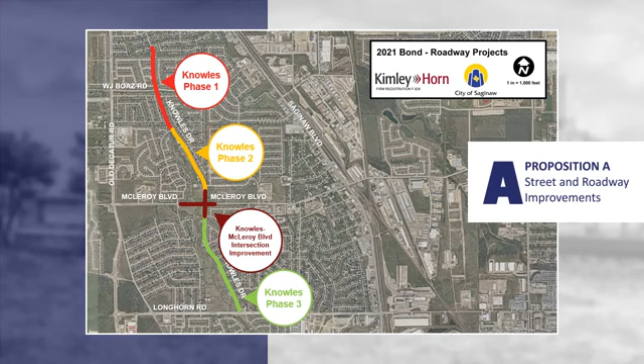Proposition A includes the following projects: Knowles Drive Phase 1, Edwards to Woodcrest, intersection improvement at W.J. Boaz. Knowles McLeroy Boulevard intersection improvement, including eliminating the low water crossing on West McLeroy Boulevard. Knowles Drive Phase 2, Woodcrest to McLeroy Boulevard. Knowles Drive Phase 3, McLeroy Boulevard to Longhorn. West McLeroy Boulevard Phase 3, Saginaw Boulevard to Knowles. West McLeroy Boulevard Phase 4, Knowles to Old Decatur.

Some of the projects may be eligible for matching funds from the Tarrant County November 2021 Transportation Bond Program. Any remaining funds from approved bond could be allocated towards other transportation or street projects.

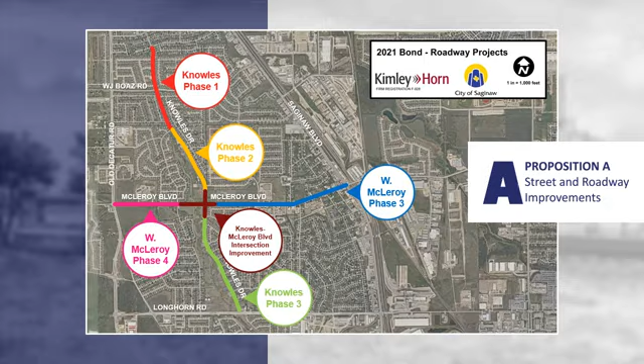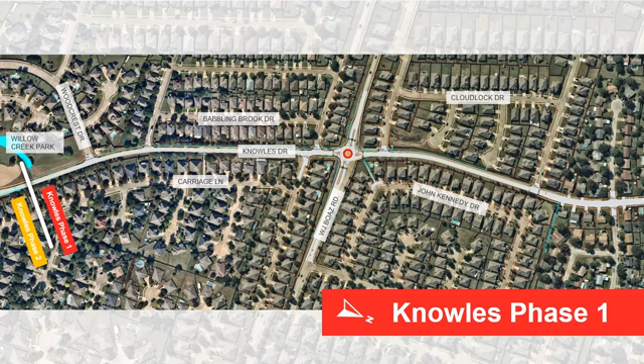Knowles Phase 1 is proposed to be a 2-lane concrete roadway with curb and gutter and sidewalk on the west side of the road. The limits of this phase are from just south of Woodcrest Drive to Edwards Drive, approximately 3/4 of a mile. There will be a single-lane roundabout located at the intersection of Knowles Drive and W.J. Boaz Road, replacing the current 4-way stop-controlled intersection. The proposed project also includes an internalized storm drain system, which will improve storm drain capacity to alleviate flooding in the adjacent neighborhoods.

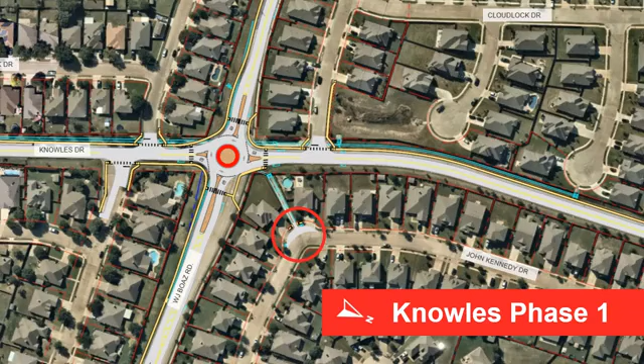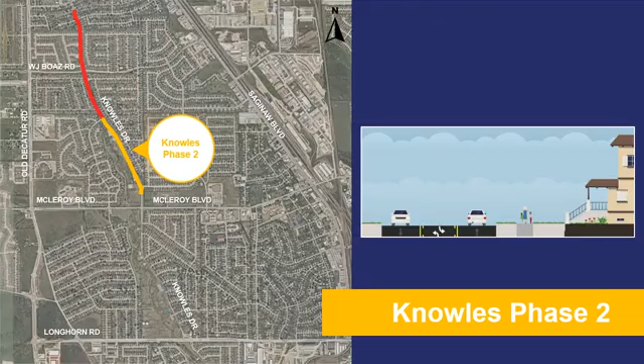Knowles Phase 2 is proposed to be a 3-lane concrete roadway with curb and gutter, including a center turn lane with sidewalk on the east side of the road. The limits of this phase are from north of McLeroy Boulevard to south of Woodcrest Drive, approximately 1/3 of a mile. There will be a pedestrian crossing from the neighborhood to Willow Creek Park near Kingsbrook Lane. The proposed project also includes an internalized storm drain system, allowing for the removal of the existing roadside ditches.

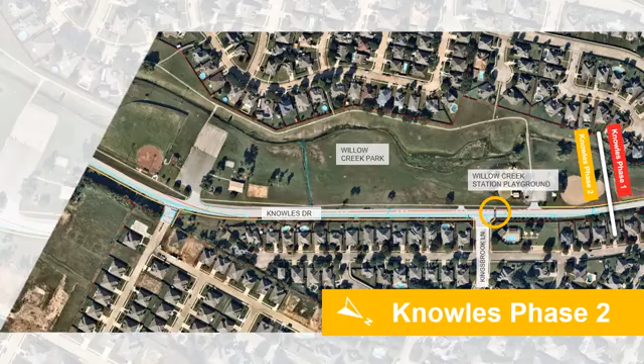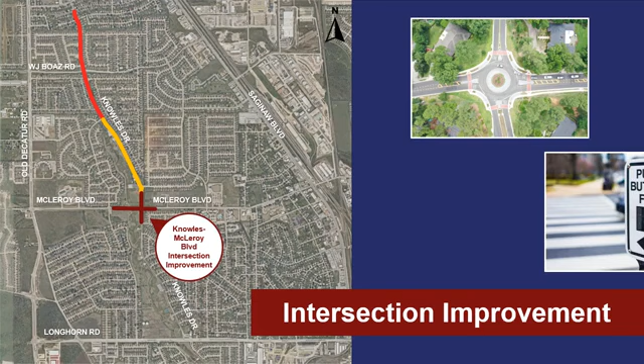Knowles McLeroy Boulevard intersection improvement is proposed to be a single-lane roundabout located at the intersection of Knowles Drive and McLeroy Boulevard, replacing the current signalized intersection. There will be enhanced pedestrian crossings at the intersection, which include raised crosswalks and push-button activated pedestrian crossing signs. A wider pedestrian crosswalk will be featured in the roundabout to ensure pedestrian safety, especially the crossing of McLeroy Boulevard on the west side of the intersection. This will allow for larger gathering points on both sides of the road and give pedestrians a much larger safe harbor space in the middle of the crosswalk when proceeding through the intersection.

Part of this project will include raising McLeroy Boulevard and upgrading the storm crossing just west of Knowles Drive to alleviate frequent flooding issues. Currently, the creek overtops the roadway during a major storm event, causing it to be closed for safety.

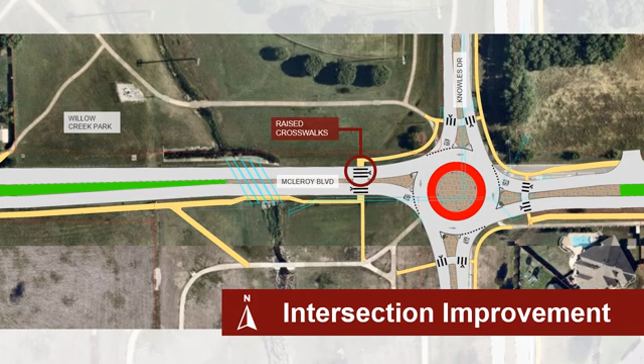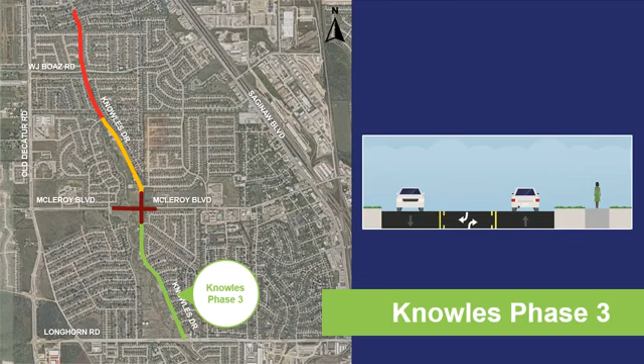Knowles Phase 3 is proposed to be a 3-lane concrete roadway, including a center turn lane with sidewalk on the east side of the road. The limits of this phase are from Longhorn Road to south of McLeroy Boulevard, approximately 3/4 of a mile. The project also includes the installation of a traffic signal at the intersection of Longhorn Road and Knowles Drive, and 2 pedestrian crossings from the neighborhood to Willow Creek Park. The proposed project also includes an internalized storm drain system, allowing for the removal of the existing roadside ditches.

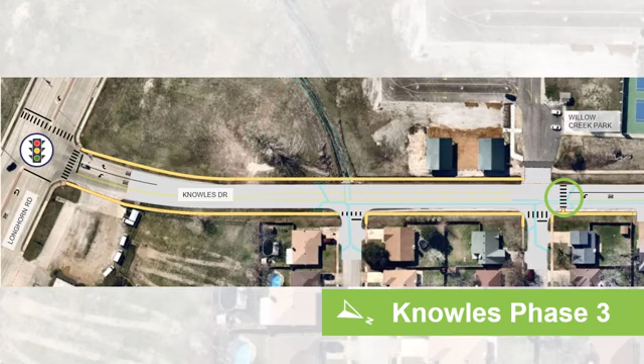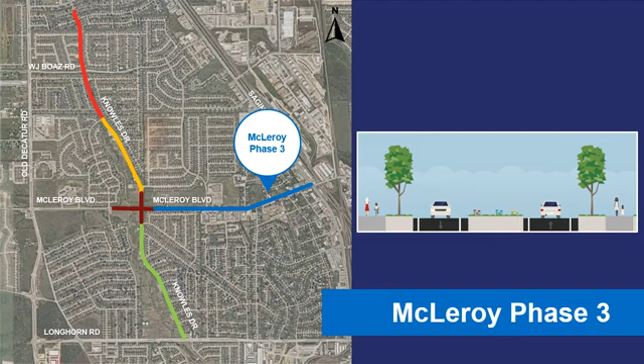The limits of McLeroy Phase 3 are from Knowles Drive to Saginaw Boulevard, approximately 1 mile. This section of McLeroy is planned to have 1 lane in each direction, raised landscape median or center turn lane, 8-foot wide sidewalks, and on-street parking where feasible. The section of McLeroy will be landscaped and provide pedestrian improvements to allow for parking and pedestrian access to these city facilities: City Hall, Aquatic Center, and Police Department. There are plans for the addition of a new fire station, library, and senior center.

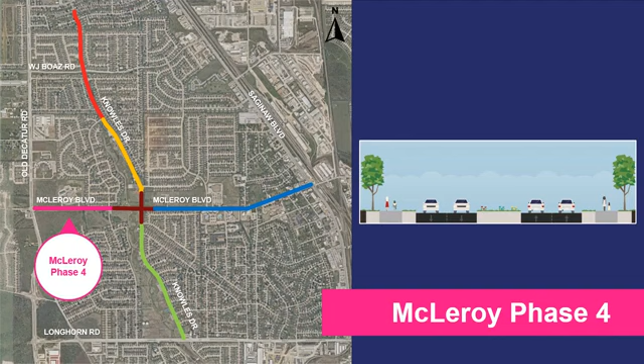McLeroy Phase 4 is proposed to be a 4-lane divided concrete roadway with 8-foot sidewalks on both sides of the road. The limits of this phase are from Old Decatur Road to Knowles Drive, approximately half a mile. The proposed project also includes an internalized storm drain system, allowing for the removal of the existing roadside ditches.

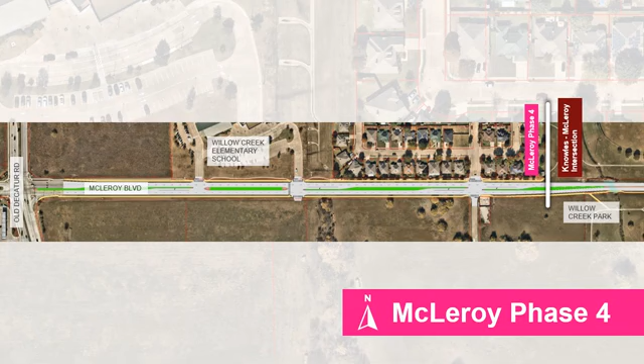Proposition B is $11,200,000 for a new senior center and parks improvements. The new senior center is planned to be a 10,000 square foot facility costing approximately $7.2 million. It will be located along McLeroy Boulevard and will include a game room, arts and crafts room, a larger and upgraded kitchen, a large multipurpose hall, outdoor activity space, and parking improvements. The senior center is planned to be adjacent to the proposed library.

This proposition also includes $4 million for additions to city parks, such as trails, lighting, benches, sports recreational facilities, upgraded park equipment, and parking. $4 million for park improvements will be prioritized based on the recommendation of the Parks Board using a 2019 Parks Assessment as a general guide.

Proposition C is $18,700,000 for a new 30,000 square foot, 2-story municipal library along McLeroy Boulevard. The current library is 10,000 square feet and functions like a community center, hosting a wide range of classes, youth programs, and community group meetings. Examples of classes offered at the library include GED exam preparation, English as a second language, U.S. citizenship, and conversational foreign language classes. Community users of the facility include writers groups, arts and crafters, youth organizations like the Girl Scouts, and homeowners associations.

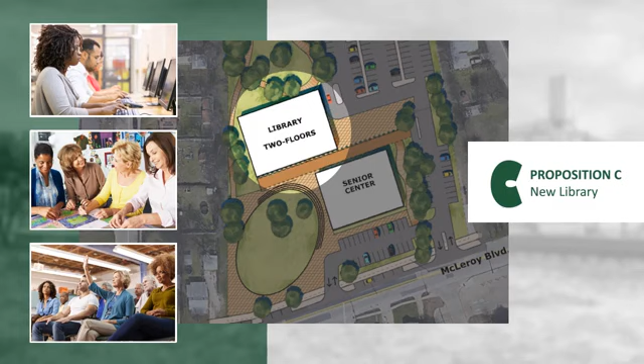The new library will include a multi-purpose meeting room and conference center, expanded computer stations, a business center, and personal study rooms. This project also includes an outdoor learning and activity space for all ages.